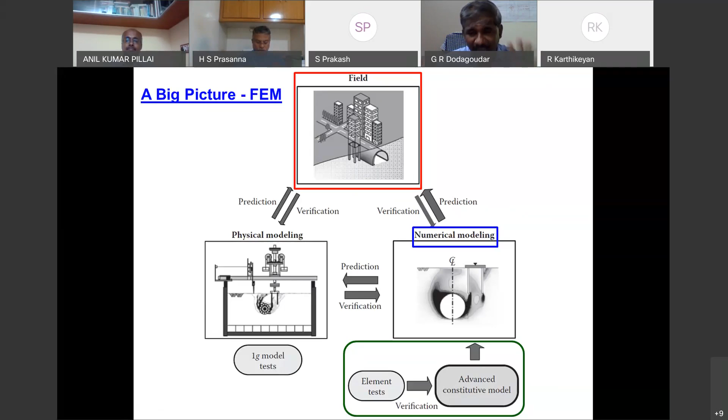The use of finite element is to predict the behavior of a prototype well in advance before erection. You can achieve this through computational modeling, or physical modeling in 1G scale, or centrifuge modeling, that is NG scale. Invariably, finite element requires constitutive models. The parameters needed for these models have to be evaluated based on element tests, or at most field tests, in order to obtain the parameters. Later you can use any of the softwares. Nowadays softwares are so powerful you can rely on those results and then execute the constructions.

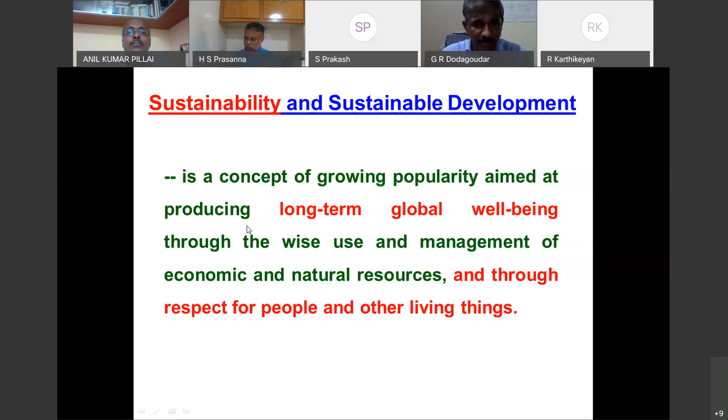This is the more comprehensive definition: a concept describing mankind's ability to create a world for humans and non-humans that is environmentally, socially, and economically sound. Note this word carefully - you must have environmental first, not economy first. Even without economy in your design, that's perfectly all right. It provides for current population needs without damaging the ability of future generations to take care of themselves. Bluntly put, sustainability means you should enjoy enough, but allow others to enjoy too. At the end of the day, you have to keep enough for future generations to take care of themselves.

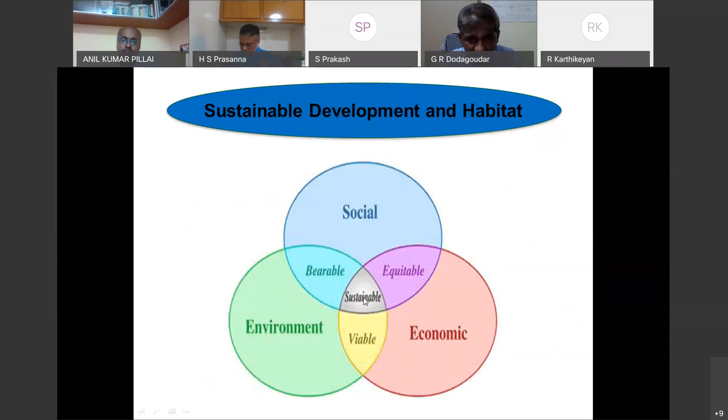This can be put in this form: sustainable development and habitat. What do you call sustainable development? Anything which is sustainable has to be bearable, equitable, as well as viable.

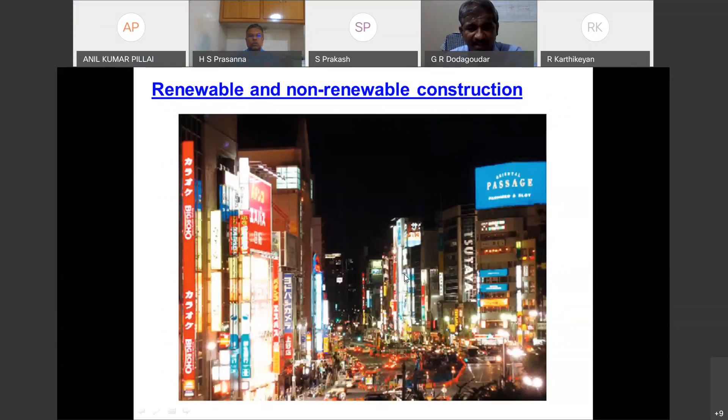With this, we'll move on to materials. What are materials? When stuff is useful, we show it respect and call it a material. When the same stuff ceases to be useful, we no longer respect it and call it waste. Basically, the definition of material and waste is relative and differs from person to person.

Now a little more about materials - why are materials so special, and why is man so special when using materials? Homo sapiens, that is us, differ from other species in our competence in making things out of materials. You have to accept this competence. We are not alone in the ability to make things - like us, many creatures make things out of material. But the difference lies in the competence demonstrated by man in his extraordinary ability to expand and adapt that competence through research and development. That is the reason we have an edge.

One can say materials have literally advanced mankind since earliest beginnings. You can see even our civilizations have been named after materials.

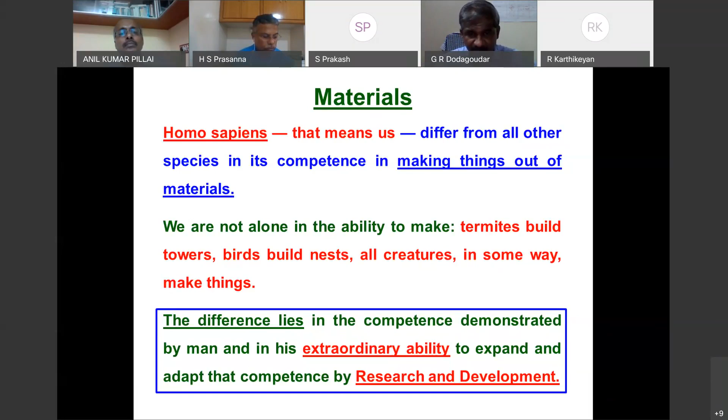Another important point here is to understand a little about embodied energy - I will explain this in the next slide. Take for example some materials: steel is 26 megajoules per kg. This is the annual consumption - right now, or 10 years back, this was the annual consumption. Similarly we have aluminum alloys, polyethylene, concrete, and device grade materials.

Take for example concrete - even though the embodied energy is 1.2, the cement industries are not that effective or efficient. Right now the concrete consumption annually is 30 billion tons - please understand, it is not just 1.5, it is 30 billion tons.

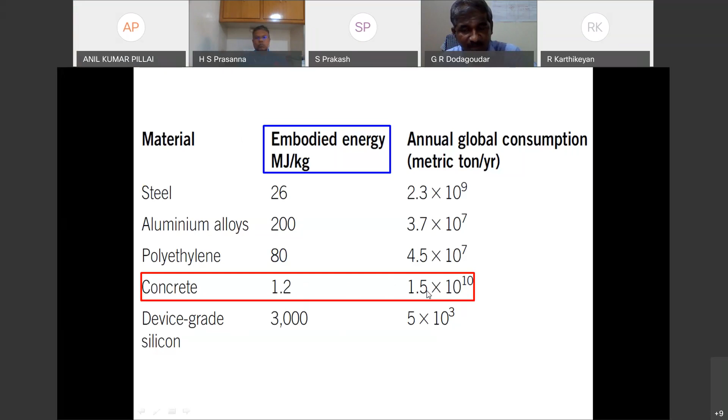The energy per kg of usable material is the embodied energy of the material. Even though you are constructing pile raft foundations, how much cement you are using, how many aggregates you are using, how much you are literally excavating, all of this matters because everything depends on it. I want to tell you at this point, 21st century living is equal to material consumption plus energy consumption, nothing more than this. Somehow you have to consume these two sparingly.

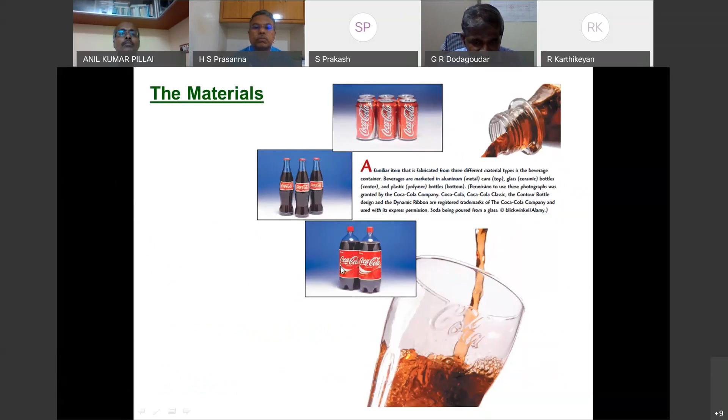Okay, where this PET is used, literally talk about materials. These are all different materials. Actually, PET granules are used in the manufacture of these containers, especially these cold drink containers that you are seeing here. Now, evolution of engineering materials with time.

Okay, a little more about materials. Materials are probably more deep seated in our culture than most of us realize. Materials are used extensively in transportation, housing, clothing, communication, recreation, and food production. Virtually every segment of our lives is influenced to one degree or other by materials. Basically, what has happened historically is that the development and advancement of societies have been intimately tied to the members' ability to produce and manipulate materials to fill their needs. Accordingly, our early civilizations were named after the capacity of human beings to develop materials to fill their needs. Accordingly, they are called the Stone Age, Bronze Age, as you have seen earlier.

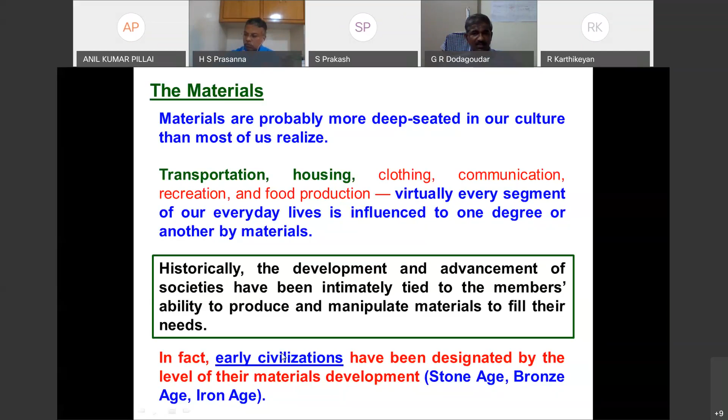Now coming to this dependence and dangers. Dependence is dangerous. If you depend on anything, take for example, nowadays for COVID treatment, we are depending on the government. How many days can one depend on the government? Who has to take care? Dependence is dangerous. Dependence exposes you to exploitation. That is the biggest problem. That's the reason we are using non-renewable material up to 96% right now. You have to be very careful.

Earlier, you used to treat materials as the faithful servants of human beings. If at all you want to give something to the new generation, we as human beings at present are supposed to be obedient servants of the material. Then only can you achieve the objective of sustainable development.

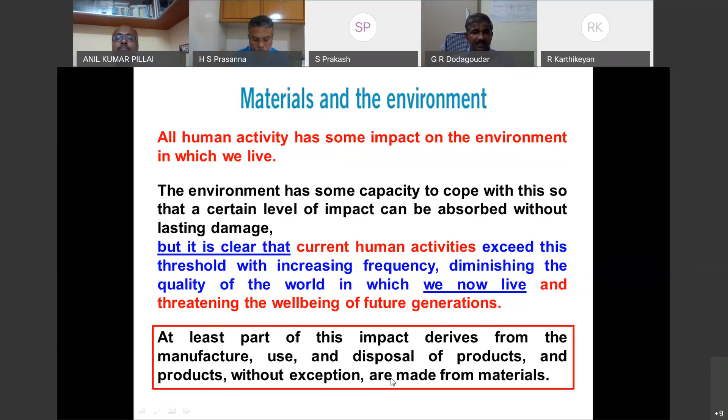With this, I'll move on to materials and the environment. How is this environment connected with the material? All human activity has some impact on the environment in which you live. The environment has some capacity to cope with this, that a certain level of impact can be absorbed without lasting damage. If you are creating some small impact, yes, the environment is going to take care of it on its own. But it is clear that current human activities exceed this threshold with increasing frequency, diminishing the quality of the world in which we live and threatening the well-being of future generations. At least part of this impact derives from the manufacture, use, and disposal of products, and products without exception are made from materials. That is how materials and environment are related.

What is the remedy for this? The remedy is you have to go for environmental design. In environmental design, we have two designs: one is for the environment, another one is for sustainability. What is design for sustainability? When you talk about sustainability, you have to adapt to the lifestyle that meets present needs without compromising the needs of future generations. Time scale is measured in terms of decades and centuries. Even though you are designing a pile raft, you have to think not in terms of 1 or 2 decades, at least you can think half a century. That is design for sustainability.

And then a little bit about the material life cycle, just to inform others. You will maybe be seeing only the product, how the product has come. Usually it will come to the natural resources, that may be energy, that may be feedstock.

Feedstock means your raw material and ore, and then the transport. Most of the times ore will be available elsewhere, so that has to be transported to some initial factory site where you are going to produce the materials. You have to have everything.

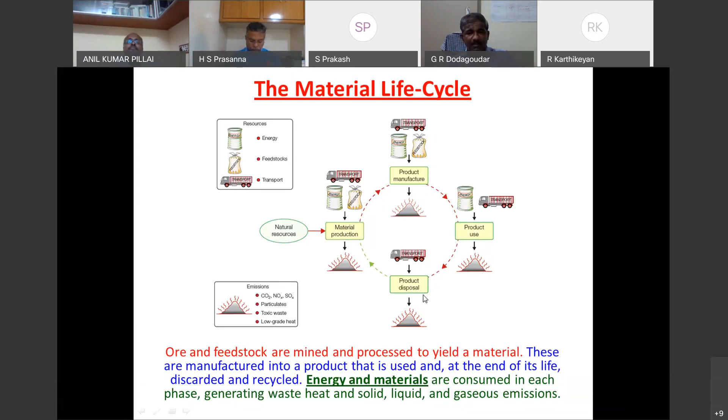When you produce anything, finally you are going to have some emissions, which may be in this form. Later it will go to the factory, where you produce the product, and then the product will be used. After the end of its first use, it can be discarded, recycled, or downcycled. Finally, after completion of its complete life, it has to be disposed. This is how we make use of this material life cycle.

We don't know where we are going to reach. We are more towards the 8 billion population now. This slide gives the population of the 25 most populous countries.

Am I audible, please? Is everything fine so far? Hello? It's fine, you can go, okay. Sir, yes, if there is any problem, we will let you know, sir. There is, yes, no please, point. Yes, please. Thank you, thank you, sir.

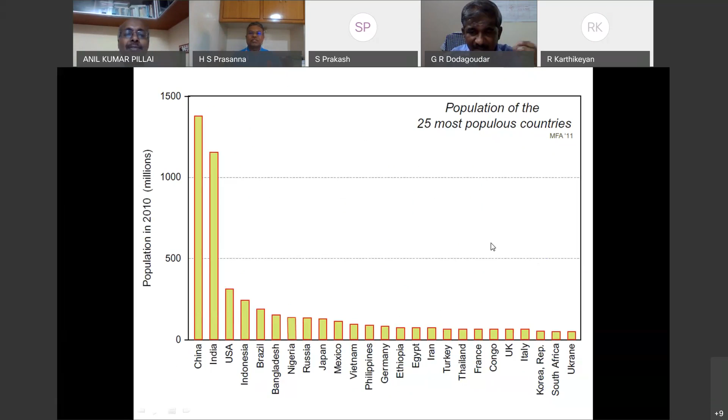You have a civil aircraft. Usually these are the life cycle phases: material production is the first one, the second is the manufacture, and the third is the transportation and use.

Actually, in case of aircraft, while usage only, you are going to use maximum energy, whereas in case of the material stage or manufacturing, you are going to use less. Similarly, for the family car as well as for an appliance like a refrigerator.

Whereas in case of a multi-story parking lot, or even any software park or any mall, you just see here in the material - in the usage you may not use more power. But in case of a private house, like our own houses, it is almost like a balance during material.

That's the reason one has to be very, very careful. If you are using unnecessary material which is going to consume a lot of energy, you will have a lot of losses in your building. That's the reason you have to invest a lot.

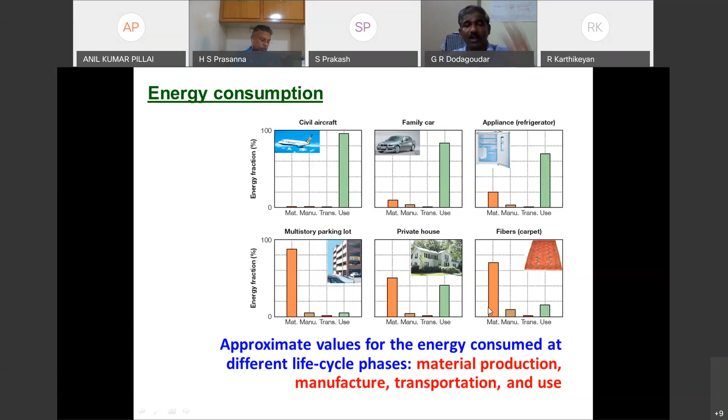Another one, fancy type of things - fibers, carpet, and all - will have a lot of material consumption in the beginning. Then coming to the end of life options, there will be different end of life options. Anyway, I'm not going to spend too much time on this.

In order to remedy all these impacts on environment that I told about so far, one has to choose the eco design. Eco design consists of two parts: one is eco audit, another one is the design.

Basically what happens is, these are the life phases: materials, manufacture, transport, use and disposal. You have to assess the energy as well as the CO2 release over life with respect to each of these five. What you are optimizing here, you have to minimize. In case of material, you have to minimize the mass of part, embodied energy, and CO2 per kg.

Similarly for manufacture, transport, and use. Especially in disposal, you have to select non-toxic and recyclable materials, and accordingly think of disposal.

Then material charts for eco design. Let's assume you are going for eco design—this is not at all necessary in our geotechnical engineering or even structural engineering. Yes, to some extent they are doing it. Nowadays they are thinking of using waste material and recycled aggregate. But one has to be very careful about how much energy is utilized in extracting the recycled aggregates.

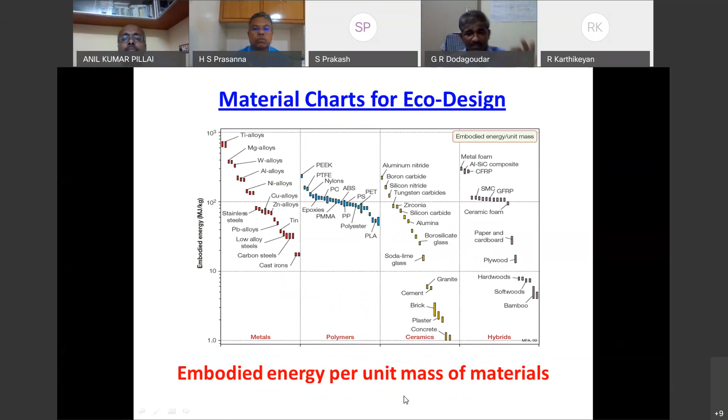These charts help us make an eco-friendly material choice, that means an eco-informed material choice. One has to use this, whether you want to use metals, polymers, ceramics, or hybrids—accordingly you have to go. But the only thing you have to ensure is that your embodied energy is minimum, whether per unit mass or per unit volume.

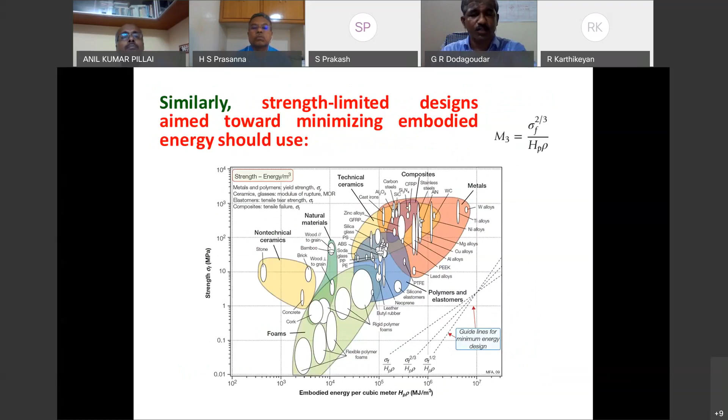And if you want to select the best material for your beam with a specified stiffness and length, you have to think of selecting this. This helps us make an eco-informed decision regarding material selection—this is for the best material for the beam. Similarly, in case you are thinking about strength-limited designs where you aim to minimize embodied energy, one has to make use of these things. All the materials are given here, even our concrete is given here.

One can think about how to make an eco selection. I want to tell you about these materials: one is glass, one is PE, another is PET, aluminum, steel. What are the design requirements? Design requirement is function, constraint, objective, and free variable. First of all, I have to have a container for cold drinks, then it's supposed to be recyclable, and you have to minimize embodied energy per unit capacity. Let's assume per unit capacity is a liter.

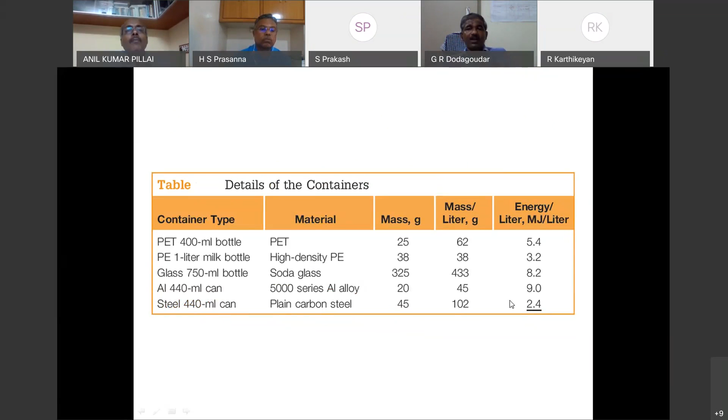Then choice of material—some calculation has been done with respect to these different materials. Then you calculate the energy per liter. Finally, the best material is steel, a 440 ml can. But since you are using this for 1 liter, that's the reason you have to go for 2.4 megajoules per liter. Like that, you can think of any material.

Similarly, you can adopt this concept for design of pile-raft foundation. I have given a few examples: one is the earlier one, and then crash barriers. For a static barrier, how are you going to choose? M stands for material index. Depending on the different type of application, this material index will be different.

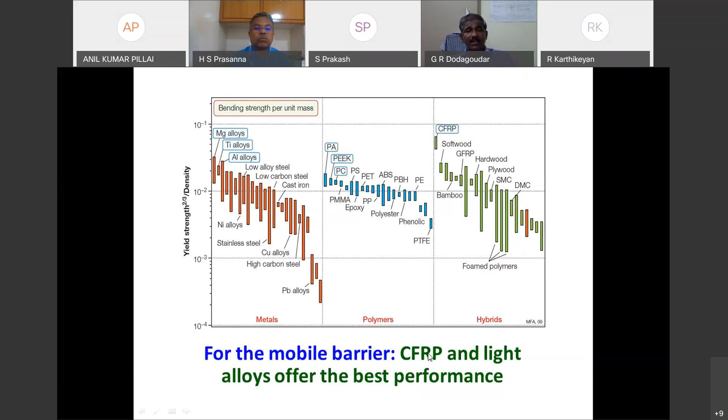Then another one is a car bumper, or else you can think of even your dynamic or mobile barrier. How are you going to choose the material? Wherever you are going to have the least embodied energy, you have to go for it. Especially for this mobile barrier, you can think of using CFRP or light alloy materials and so on.

Okay, with this I'll move on a bit to concrete—Ramco sponsored this. Nowadays they talk a lot about sustainability and durability of concrete structures, that too with byproducts and recycled materials. Because of the huge consumption of concrete, one has to think a lot and face this challenge. Most of the times you will ask: is this a waste or is it a resource? This question relates to this particular slide. Take for example pet coke, bagasse, rice husk, wood chips, or recycled aggregate—how are you going to use these?

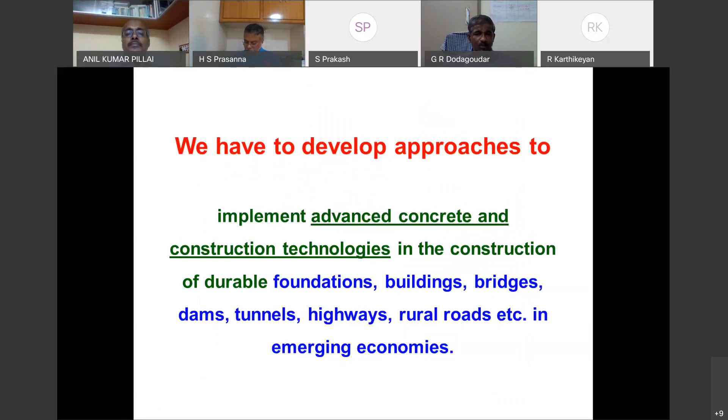Therefore, we have to develop approaches to implement advanced concrete and construction technologies in the construction of durable foundations, buildings, bridges, dams, tunnels, highways, roads, etc. in emerging economies. With this, I have covered the first part, materials and environment.

With this, I'll move on to pile-raft foundations. Now see, basically I want to tell you these are the major building parts—anyway everybody knows all these. In case you are going to have some cellar, in that case you are going to call it a substructure, otherwise it is a foundation. Both together constitute the foundation. Function of foundation, anyway you know, we have to transfer the structure load safely into the ground.

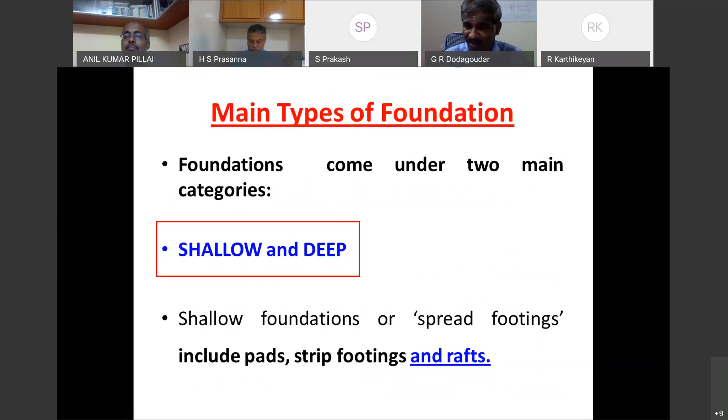Usually two types of foundation: shallow and deep. Raft is part of shallow foundation. You have to understand the analysis and design of raft thoroughly before attempting to design a pile-raft foundation. That's the reason I have given raft foundation. This is a raft foundation, and this is just a configuration—how are you going to model the raft foundation?

Over the years, we have started with the subgrade reaction approach, which one can use to evaluate the interaction effects. And if you want to bring in the coupling effects, one can choose springs like this in order to evaluate the interaction effects.

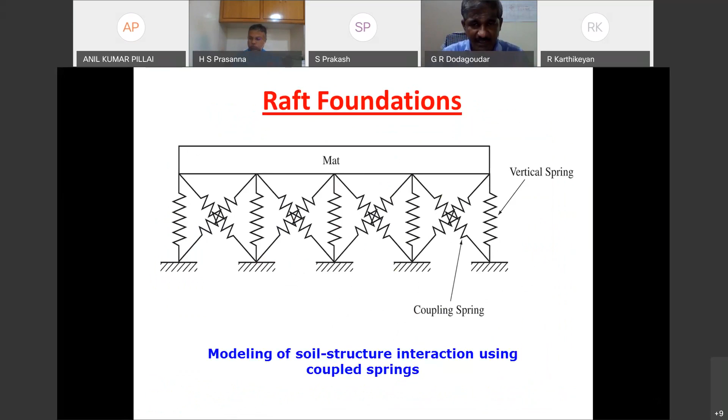If you don't want to use that, you can use a finite element approach. You can divide the bottom of your raft into a number of elements, which are connected spatially, and then this is connected in turn with the ground, the bed of springs like this.

Deep foundations include so many types. Our pile raft is a deep foundation. What is the specialty about deep foundations? Most of the time these are at deeper depths, usually more than 3 meters.

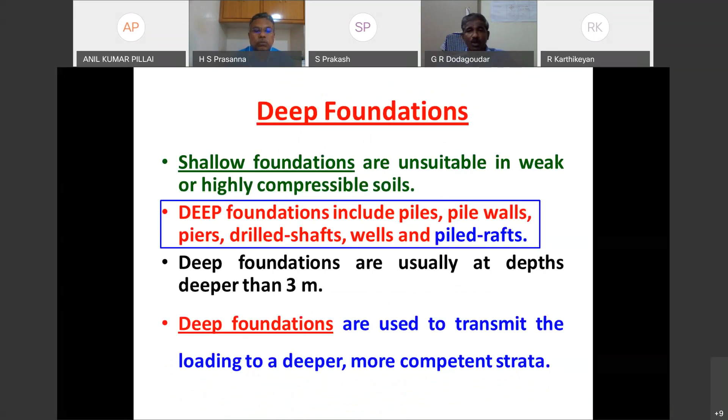They also transmit the loading to deeper and more competent strata. Another specialty of deep foundations, these two points are really very important, even though they look trivial: the depth of foundation is very large in comparison to its width. This is very important. Once you understand and appreciate this, you will understand how load is literally getting transferred in case of deep foundations.

Another point: you cannot simply use open pit excavation methods to construct deep foundations. For this, you have to have specialized equipment. These are the two special features of deep foundations. This is the load transfer mechanism between deep foundation as well as shallow foundation.

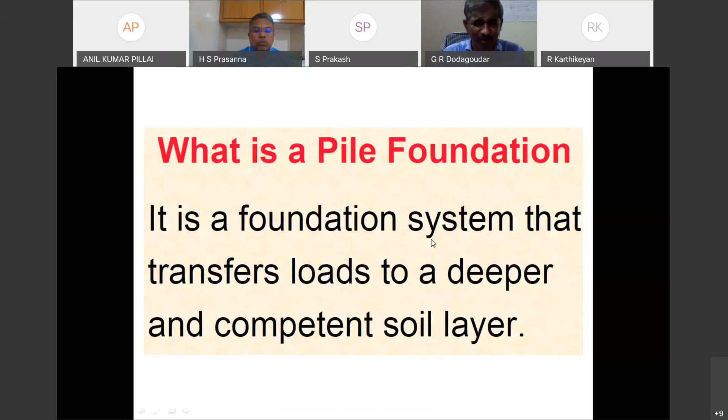Piles are always used in a group. They may be drill shafts or piles, or sometimes now they are using wells. In order to construct a high-rise building, you don't have to think of using some small piles. Better you can go for a single drilled shaft, or else you can go for a well. As far as India is concerned, you are using caissons, alternative name is well. Always they will be used in a group.

Okay, now see this carefully. One has to understand a little bit about the classification of pile systems. Even if you don't have time, at least you have to understand this. This is very important: friction pile and end bearing pile.

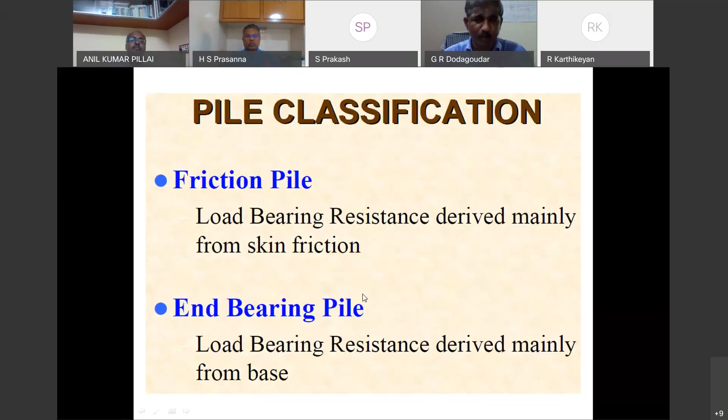Everybody knows this, but still I want to tell something about it. The most important geotechnical design requirement for most piles is that they have sufficient axial load capacity to support the applied loads. I want to tell you one thing: if you design your foundation, especially using piles, properly, then 20% of your axial load capacity is capable of taking lateral load. Then the pile transfers axial load through side friction and end bearing.

Hello? Everything is fine? Yes, sir. It's fine. Yes.

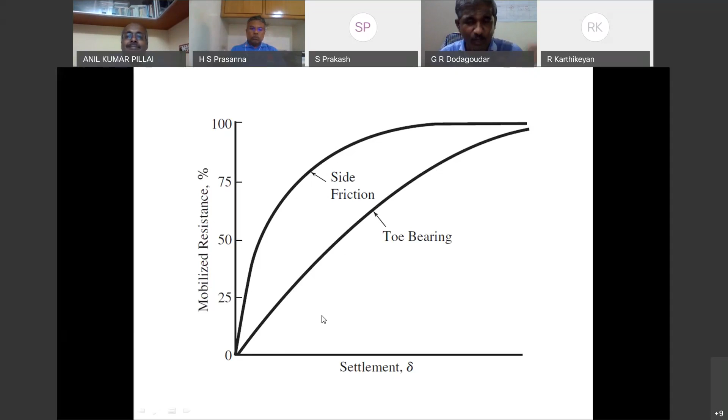How much should one consider the ultimate side friction? Just because soil is providing enough, one should not go for the ultimate value of side friction. This is also very important. Before executing any of the pile foundation activities, you have to respect all these points.

In that case, you have to depend only on the factory made piles or whatever is available in the market. So one has to be very, very careful while selecting the piles.

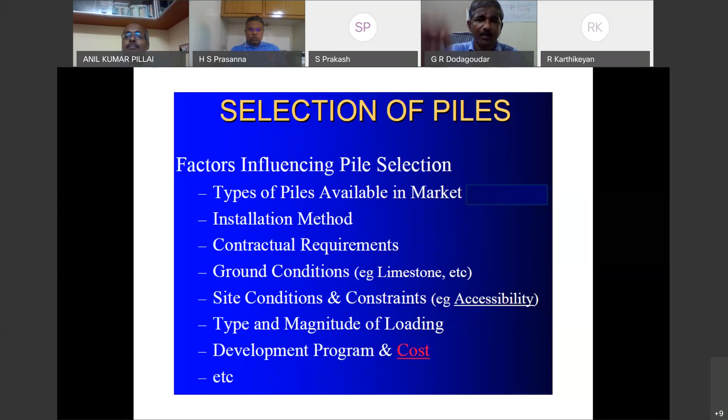Now, a little bit about design. Usually, while designing, we look for allowable structural capacity as well as allowable geotechnical capacity. Most of the time, geotechnical capacity is controlled by settlement. In case you have negative friction, one has to cater for that. Now, how are you going to get the pile capacity?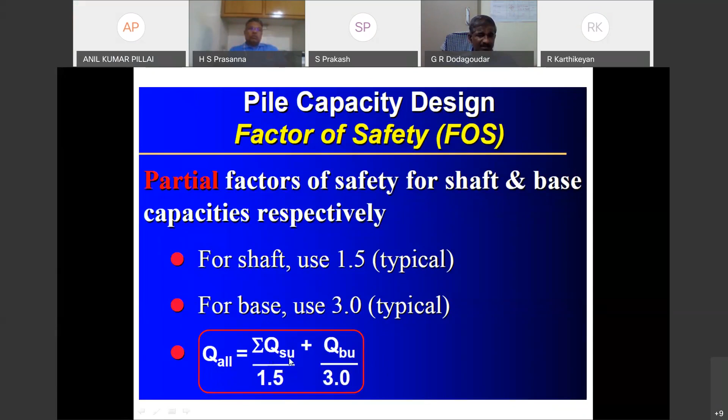In case you want to use only one global factor of safety, usually 2 is used in European countries. In India, we have to use 2.5. Only a few companies, like L&T and SPCL, are using 2. One has to be very, very careful. If you have total quality control during execution, then only you can go for 2. Otherwise, we have to go for 2.5.

Then the concept or idea of PRF. Why does one have to go for PRF? Okay, now please understand.

Please see this very carefully. Let's see, this is a single pile subjected to a load, and this is the ultimate load. Let's assume this ultimate load is divided into 4 parts. When you apply the first part, this is how you get the stress or isobar. Then the second, third, and fourth. The moment you reach the fourth one, that means it has touched the ultimate.

The same thing, when you use it for a pile group, what will happen? This is the isobar of a single pile, and this is the isobar of a pile group. Because of this isobar, you get a highly stressed zone. Because of the highly stressed zone, you get high strain. High strain multiplied by the respective layer thickness.

The video is not visible, sir. Hello, one minute please, Sangeeta. One minute please, video is not visible. What have you done? You can take a minute break also, sir. No issues. It's okay, now you are not visible. The slide is visible, now you are visible, sir. Yes, it's perfectly all right now.

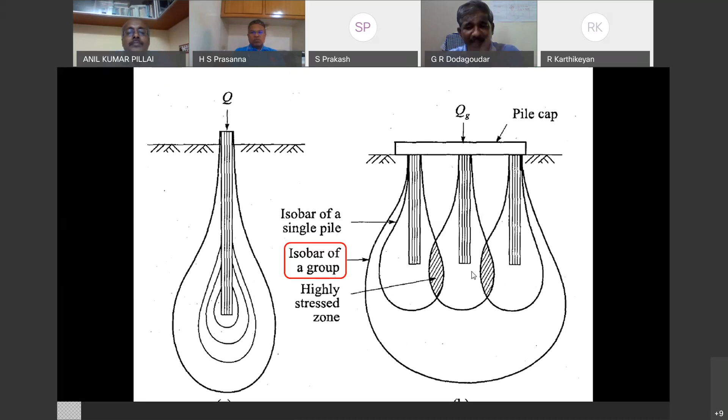Without understanding the interaction effect, you cannot do anything. Otherwise, what will happen if you don't know how to evaluate the interaction effect? Better to keep a large spacing so that you don't have any interaction. In that case, total load will be the summation of the individual load capacities of a single pile. But you have to evaluate it.

If you are not evaluating, what will happen? I want to tell you in the next slide. Please see the next slide. What will happen if I don't want to evaluate the interaction effect? It's fine, it's left to you, but finally you end up unnecessarily putting a lot of money below the ground.

In this case, basically what will happen? You are going to reduce the number of piles, no doubt. You will reduce the number of piles, but what will happen to the thickness of the pile cap? Actually, in a pile foundation, the pile cap does not transfer any load directly to the soil. It just acts as an intermediate medium, taking load from the structural column and passing it on to the piles.

The moment you put piles far apart, what will happen? The requirement of your pile cap thickness will be tremendous. If you simply put a larger pile cap, it is of no use. Here is where the genesis of the piled raft concept has taken birth. Anyway, I'm going to increase the thickness of the pile cap, forcing it to transfer a certain amount of structural load to the soil directly beneath.

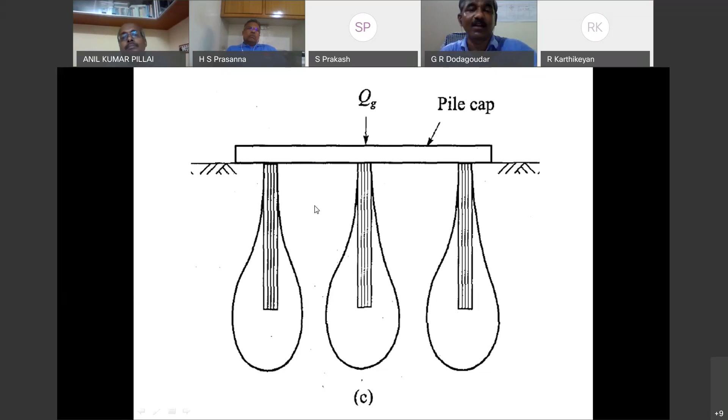Then how are you going to evaluate how much load has to be transferred to the raft cap? In that case, the cap will be called a raft. Okay, now let's see basically what will happen.

Some background and historical note.

This first sentence is very important. Recent years have seen major advances in understanding how pile foundations interact with soil. If you look at the number of papers published, pile foundations are the highest nowadays, and second highest are in ground improvement.

Earlier, the number of papers published was mostly on stability of slopes and shear strength, in order to understand the shear strength phenomena. Now, what has happened?

Particularly with respect to a pile group, the effectiveness of a pile in a particular group is generally reduced by the proximity of other piles. It happens even with human beings — if you don't like someone sitting beside you, sometimes you will not be happy. Recognizing this fact, if I am putting n number of piles, the effectiveness of a particular pile will be reduced because of the presence of other piles nearby. One has to recognize this fact.

Nowadays the current trend is more towards using fewer, more widely spaced piles. Because of this, you increase the thickness of the pile cap, forcing the pile cap to transfer a certain amount of load. While doing so, you allow the raft to contribute significantly to load transfer to the soil. That's the concept behind it.

Now coming to the historical note — why have people gone for this? Raft foundation is already perfectly understood, pile foundation is perfectly understood. Let's look at one construction that took place in Frankfurt, Germany.

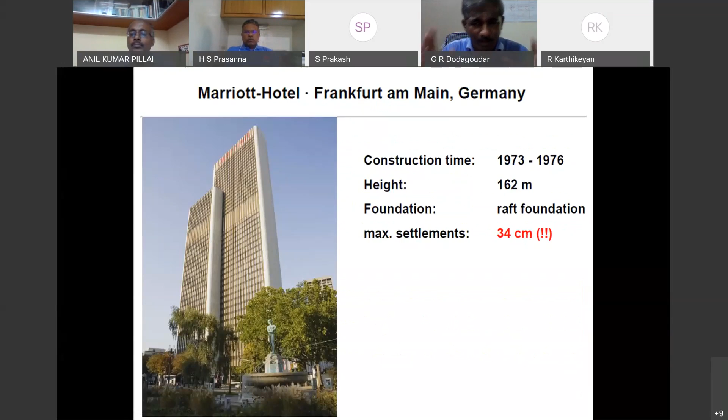The way out is you have to go for pile foundation, no doubt. But unnecessarily, you end up using more piles, and as you use more piles, it becomes more costly.

Now see a few more buildings from the same area. This is Commerzbank, construction duration 94 to 97, constructed on pile foundation. The settlement is 21 mm — perfectly all right.

Then coming to another tower called the main tower, constructed on CPRF — combined pile raft foundation. Settlement is 2.5 centimeters, perfectly all right. And then another one, 3.2 — raft foundation settlement is 11 centimeters.

Maybe it is okay for this building, but the height of this building is very less. The other one also has very little height, so this 10 centimeters is okay.

But now look carefully: settlement of foundations constructed on raft foundation is a little more, while settlement of pile foundation is less. In between, you get the settlement of combined pile raft foundation. Because of this combined pile raft foundation, you reduce the number of piles — that is how you bring in the economy.

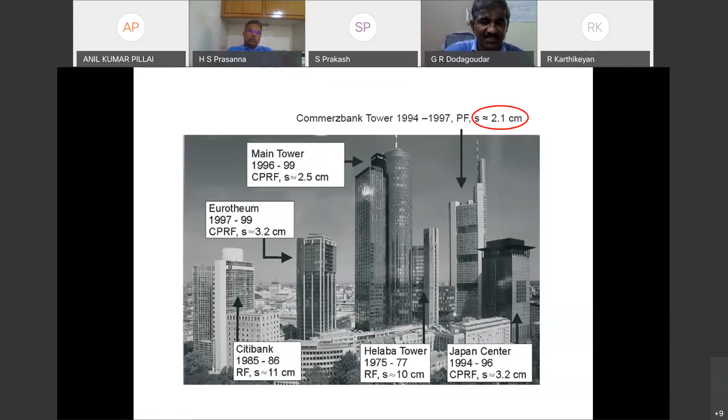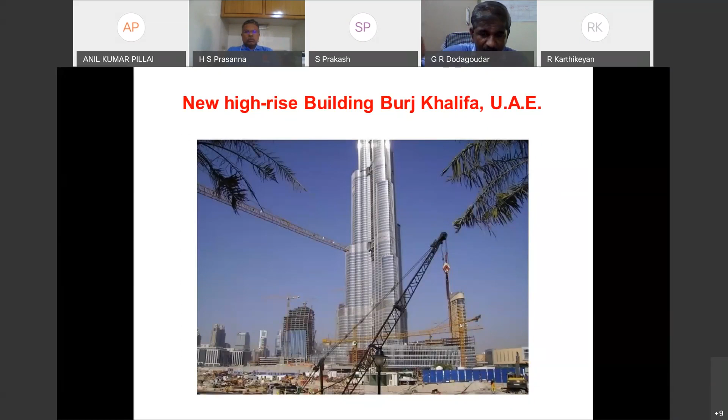I hope everybody knows this building — constructed on pile raft foundation. H.G. Poulos was the foundation consultant for this. It has been covered very well in his recent book, Tall Building Foundation Design, available online. Please do see that.

When you are using finite element, you have to evaluate higher settlement, and then you have to get lesser load. That is the fundamental behind using finite element, and then you have to verify it. Finite element works perfectly well, and this has been covered very well in that book.

Next, we'll move on. Another important thing with respect to the pile raft foundation is optimized geotechnical data acquisition. You have to evaluate; there is no substitute. In case of structural engineering, you have well-defined materials and quality assured materials.

In case of geotechnical engineering, first of all, soil is invisible. After all, we are drilling few boreholes here and there, and that too, we are disturbing only 0.1% of the affected volume. With that, you are going to evaluate the parameters. Even in spite of ground investigation, soil is still uncertain. That's the reason one has to use engineering judgment in order to evaluate the soil parameters.

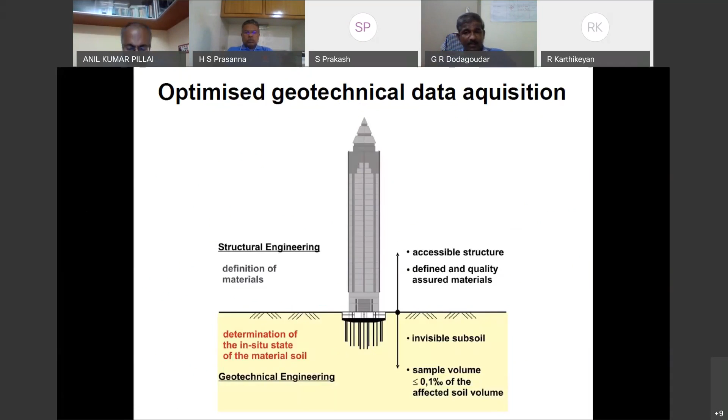There are many ways you can carry out investigations in situ. Especially the piezometer probe will use CPTU in the field at different depths. Laboratory testing is used in case you want to do some advanced analysis.

Small pile load tests also can be performed using this, or else you can go for real pile load tests in order to get the pile head load and pile head displacement. If at all you want to enhance the pile load test results, one has to go for Osterberg cells.

Usually they will be used in 3 locations. Usually one will be used exactly at the bottom. In case you have different layers, at the layer interface, one has to use and then test. Actually, Bombay people have tested more; we have done very few in Chennai.

Okay, if at all someone wants to know a little more about pile raft foundation, this is the starting paper. Please go through this; it is available online, written by Poulos and others. Now see, what is this pile raft foundation?

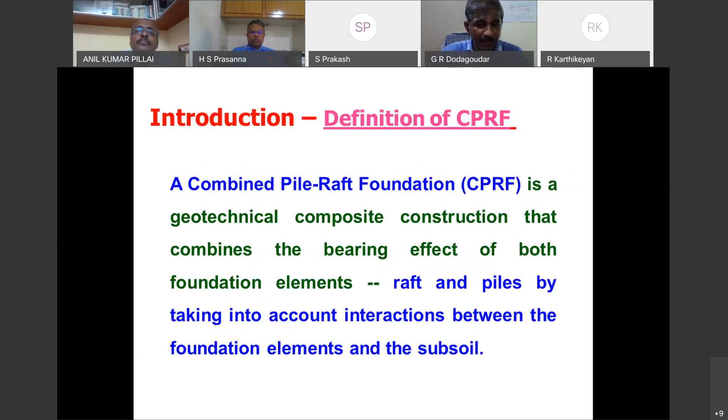Pile raft is a foundation which acts as a composite construction consisting of 3 foundation elements or load bearing elements. First one is the piles, second one is the raft, another one is the subsoil. In order to evaluate properly, one has to account for interaction between these foundation elements and the subsoil.

The moment the raft is going to transfer certain loading, you will have the settlement-dependent pressure, sigma xy of s. The total load coming on the pile raft is resisted by the total resistance offered by the raft as well as the piles. Here the raft is going to offer the raft area multiplied by this stress, giving the raft resistance, plus the summation of all the pile resistance. In the pile resistance, you have the end bearing as well as the skin friction.

You can just see, already Mandolini and others have collected some experimental data. They were able to evaluate the load shared by the raft. Usually it varies between 20 to 60%.

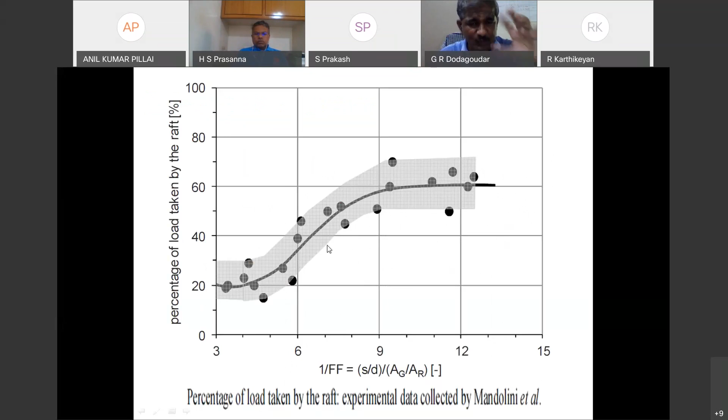For reliable design of pile raft foundation, one has to restrict the load transferred by the raft to the soil to around 40%. Otherwise, settlement of your foundation will be too high. This I already showed earlier.

Okay, why first of all pile raft foundation? This question will arise. Nowadays, these are increasingly being recognized as economical and effective foundation systems, once you recognize them as economical and effective foundation systems for tall buildings.

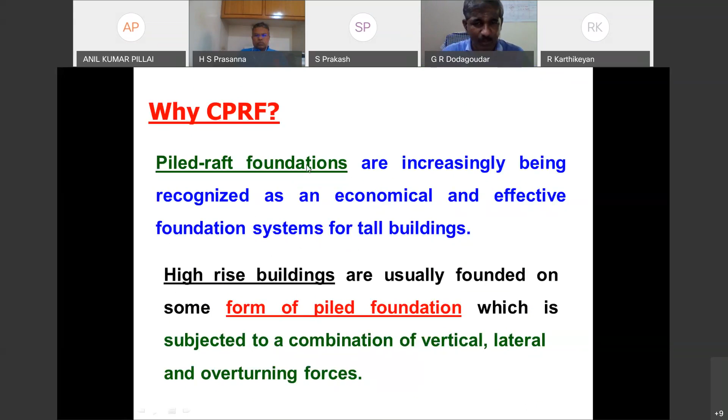Somehow, most tall buildings or high-rise buildings are supported on some form of pile foundation, which are subjected to a combination of vertical, lateral, and overturning moment loads. That is one thing. Another important thing is they are a particularly effective form of foundation for tall buildings. Not only that, the second reason is the raft is able to provide a reasonable measure of both stiffness and load resistance. This is very, very important. Here I am forcing the raft to transfer a certain amount of load directly to the soil.

By so doing, we are using that stiffness as part of the overall pile raft foundation system. The advantages are numerous. Usually piles will be acting at the serviceability loads. If you want to utilize the capacity at ultimate loading, the raft element comes into picture. Consequently, it is possible to reduce the required number of piles when the raft provides this additional capacity. That is how we bring economy into the construction of pile raft foundation.

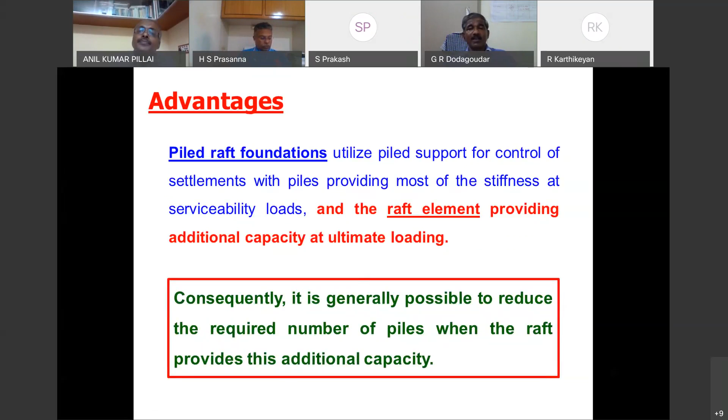Another important point most people miss: as I mentioned earlier with sigma xy, we are going to have extra lateral stress acting on the soil as well as on the piles. Due to that, you get a higher ultimate bearing capacity. This is usually not accounted for in case of usual pile foundations, but it has to be. This is the added advantage. But here you can say there is a catch.

Way back in 2001, Poulos published an old paper stating nowadays you can use pile raft foundations everywhere except soft clays. In case your cohesion is less than 20 kPa, you are not supposed to use the pile raft. Please, you have to be very, very careful, otherwise you're going to face a lot of problems. For any other type of soils, stiff clay or dense soils, you can use it, as he mentioned. But he modified his statement in the recent paper, the book Tall Building Foundation Design.

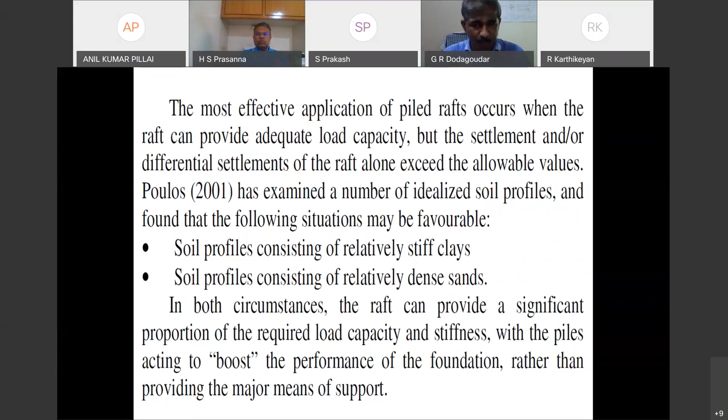So what is the catch here? The important catch is understanding the soil-structure interaction effect. It is indispensable for the proper design of pile raft foundations. One has to understand this very carefully. And then as usual, we have design principles that someone has to satisfy. Anyway, I'm going to go fast here.

Construction is one of the most important aspects, as I mentioned earlier. No matter how complicated the analysis technique, no matter how much knowledge you have, if you are not constructing properly, everything is literally useless. Basically, you have to have a geotechnical expert on site, maybe appointed by the owner or supervising authority, and you have to have protocols for the acceptance procedure.

Let's assume you have built 10 stories out of a 100-story building. The moment you reach 10 stories, you will know literally how much weight you are putting on the soil. Based on the actual loading, you have to evaluate the settlement. Based on some monitoring exercise, you already have a prediction tool like finite element analysis. You compare, and if the comparison is acceptable, then you go ahead and continue construction of the CPRF.

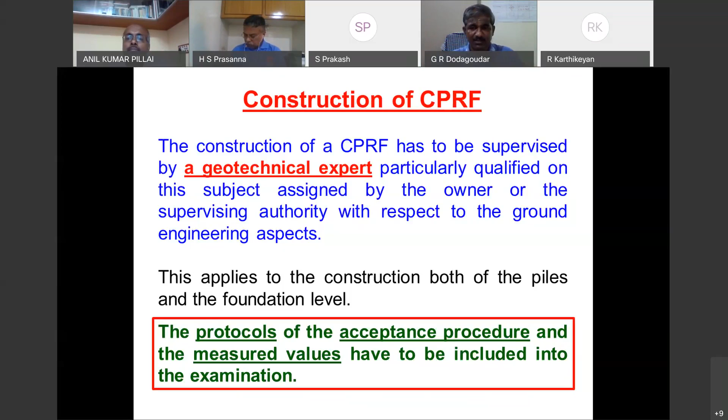With respect to this, we have an observational method. I hope you are well aware of it. But it is not a substitute for round calculations. In a way, it's a handy tool in geotechnical engineering.

Another important aspect is monitoring. This is also very, very important. You have to decide what type of instrument to use and what type of acceptance criteria one should use before execution of the PRF construction.

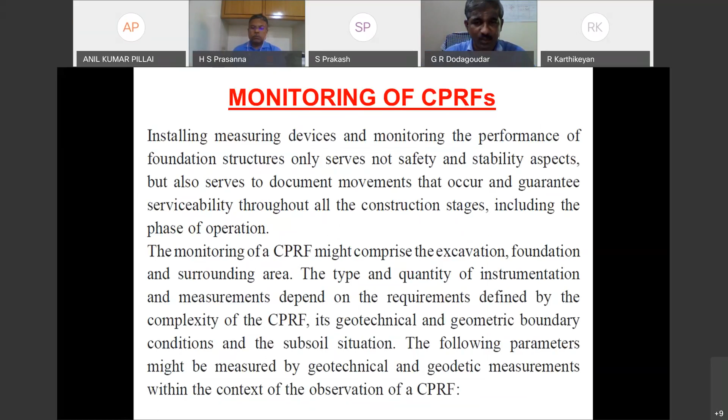Now you have to study a little bit about the interaction. In order to design pile raft foundation, one has to have a qualified understanding of different interactions. Please understand this word very carefully. Even if you take nothing else from this, please listen to this point: designing pile raft foundation requires a qualified understanding of different interactions. Literally more than 6 interactions are possible. Two interactions are not that important, but four interactions are literally important. You can instrument properly and perform experiments to evaluate the interaction, or you can have a sophisticated computational tool to evaluate all these interactions. And then finally, what is the total resistance coming from? Total resistance is coming because of the raft. Please note this very carefully.

This total resistance is supposed to be much higher than the total load coming on your structure. Total load coming on the structure is supposed to be less than or equal to this total characteristic resistance. K stands for, nowadays in Europe, they are using limit state design, that is the reason this K word has been used. Total resistance is given by the pile resistance as well as the raft resistance.

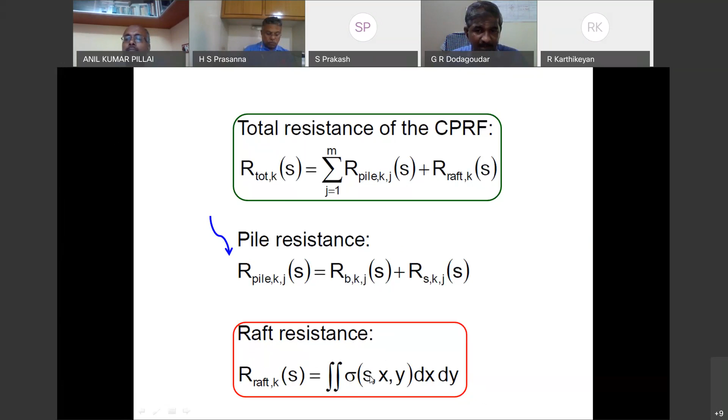The bearing power of CPRF is usually determined by the coefficient called alpha CPRF. This alpha CPRF is called the pile-raft coefficient. This is defined by the total load taken by the pile divided by total load coming, or total resistance offered by the pile-raft foundation system. Based on this, you are going to decide whether my CPRF, combined pile-raft foundation, is going to behave like a raft foundation alone, or else pile foundation alone, or in between.

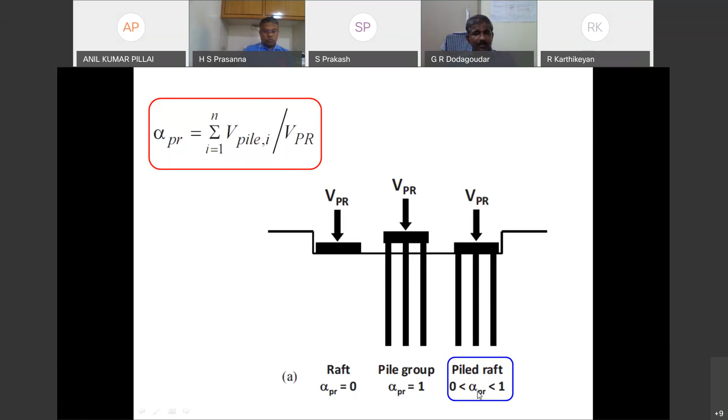In order to have a pile foundation CPRF effect, one has to restrict this number around 0.5. That is shown over here. This depends on the stress level as well as the settlement of the CPRF. You can see clearly here: if it is 0, your CPRF is going to behave like a raft foundation. If it is 1, it is going to behave like a pile group, and in that case your raft is going to behave like a cap. You have to fix this number in between 0 and 1, usually around 0.5. I will show you how to get that one next.

Sometimes you have a question, how to consider the pile Young's modulus. You are not supposed to use the Young's modulus of concrete alone. Depending on the percentage of steel used in your pile - this phi stands for the percentage of steel used - you can use this formula. It is a recent addition; many people have done experiments, and one can use this one.

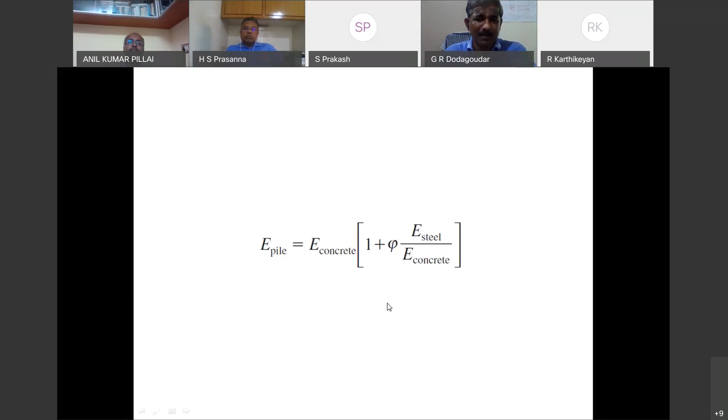After performing this, you see basically what will happen to the skin resistance. If you are at 10%, you will fully mobilize your skin resistance, and also to some extent you are mobilizing the end bearing. If you have only 1% of your pile diameter, you are at this level. If you have 0.5%, you are at this level - that means everything will be under elastic as far as a single pile is concerned.

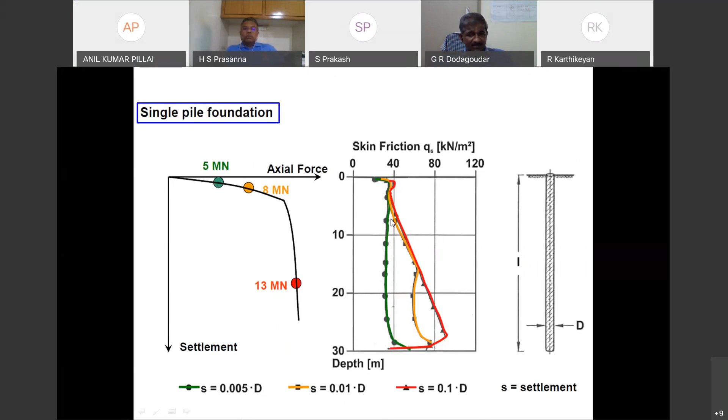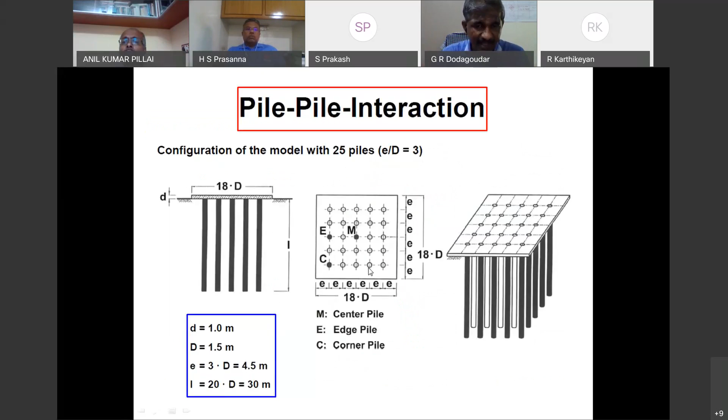Now we'll move on to understand a little bit more. So far we have done a simple exercise. Now we see basically what will happen if I have pile-pile interaction. In case of closer spacing, where spacing is 3D, I have a center pile, edge pile, corner pile, similarly with all these specifications.

In the second case, what I have is a larger spacing. When you have a larger spacing, there will be no group interaction effect. But you have to evaluate this, you have to show through experiment or else through numerical simulation.

Here I have performed this especially for load settlement behavior. With respect to your R total, it is exactly the same. You can treat it as 1 R total, 2 R total. What will happen if you have a 2 R total? Your settlement will be tremendous. Most of the times you will go on to cross the allowable limits. That's the reason you would always consult whether you treat it as an individual pile foundation, spread footing, raft foundation, or else CPRF with only pile.

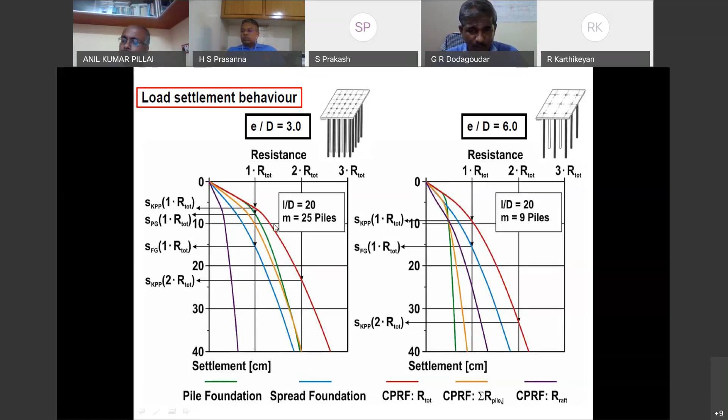In the CPRF, especially in finite element, you can force the raft to not take the load. Like that you can do it. Or else, as usual, CPRF R total - this red line corresponds to that. This is what is shown in the design philosophy.

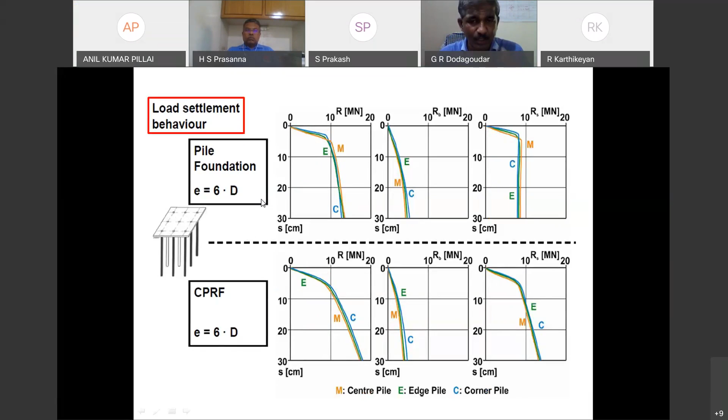When you consider 6D spacing, now see this very carefully. What you can infer from this plot is there is no interaction effect. That is the reason the resistance versus settlement is not shown for single pile.

Okay, with this little understanding, let's move on to the understanding of a few case studies - how people have used this pile CPRF concept. This is one of the first applications in the world as well as in Germany.

This particular building is called Messe-Torhaus, situated in Frankfurt am Main, Germany. This was the first application in the world as well as in Germany. Construction duration is 1983 to 1985. These are the specifications of the raft. The CPRF of the Messe-Torhaus consists of two separate rafts - one is north and another one is south - each with 42 bored piles with a length of 20 meters and diameter of 0.9 meters.

Below each raft, the piles are arranged like this - 7 rows, 6 columns arranged uniformly under each raft with pile spacing of 3 to 3.5. This is very, very important. One should not stick to a single pile spacing; it depends on the load coming. Whenever the load is more, you have to go for closer spacing. Whenever the load is less, you have to go for larger pile spacing.

The both rafts have dimensions - these are the dimensions of the raft, 17.5 into 24.5. Each raft is forced by an effective structural load of 200 MN. It is a very high load.

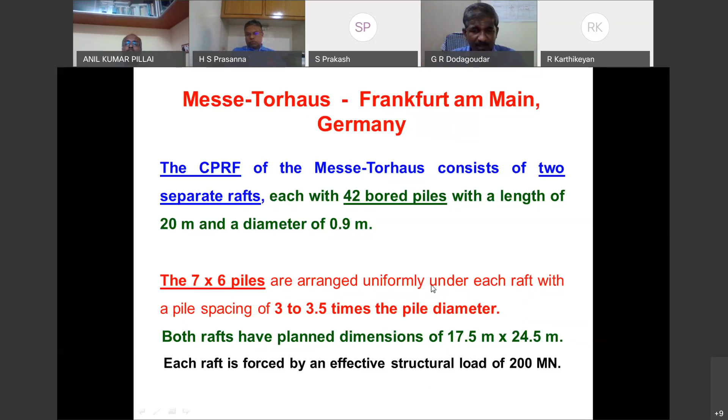Now I'm going to move on to the second case study. This is well documented in the ISSMGE technical report, report number TC212. The name is Messeturm, Frankfurt, Germany again. Basically, what they have done is initially they started with the concept of shallow foundation, that too using a raft. They could get more than 40 centimeters of settlement.

First of all, it is not at all acceptable that for this 40 centimeter, 75 to 80% could be able to get within the top 20 meter. Again, it is very, very difficult. That means you are stressing the top 20 meter below your foundation.

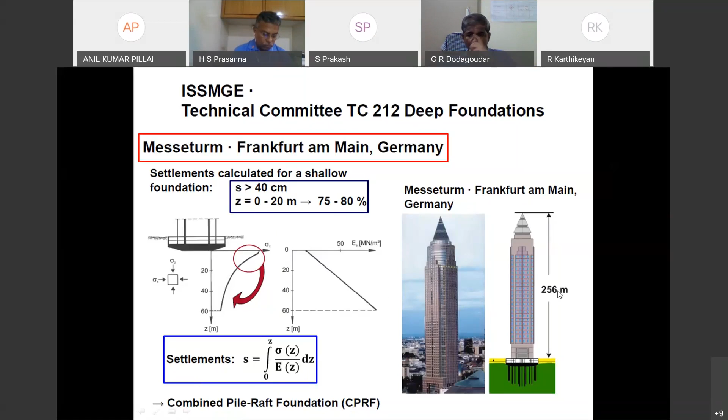Anyway, you can see in the next figure the configuration of the pile raft. The dimension is 58.8 by 58.8. Depending on the load, they used 3 rings: the center or inner ring, the middle ring, and the outer ring.

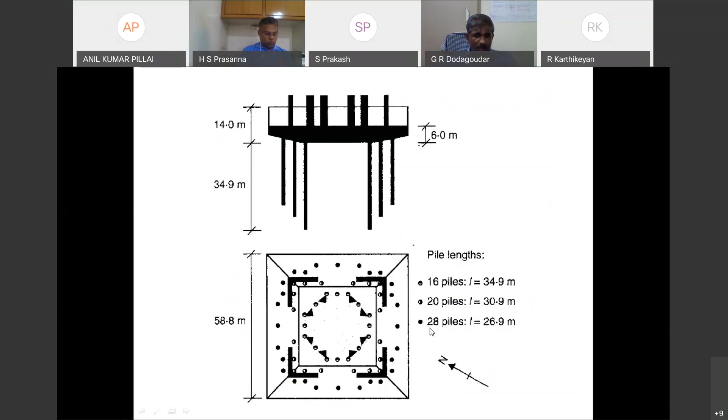Depending on the ring, they also used different lengths. Please see this very carefully. This is more clear in the second slide. This is the configuration of the pile raft, showing the thickness of the raft, and one ring, another ring, another ring. But all the rings have different lengths. Totally, you have 64 piles with different lengths. Average length is 30 meter.

With this, they have instrumented as usual. Some are instrumented piles, some are extensometers, and they have 11 raft pressure cells. These are needed in order to know the raft pressure or stress transferred to the piles, so that you can evaluate the load taken by the raft.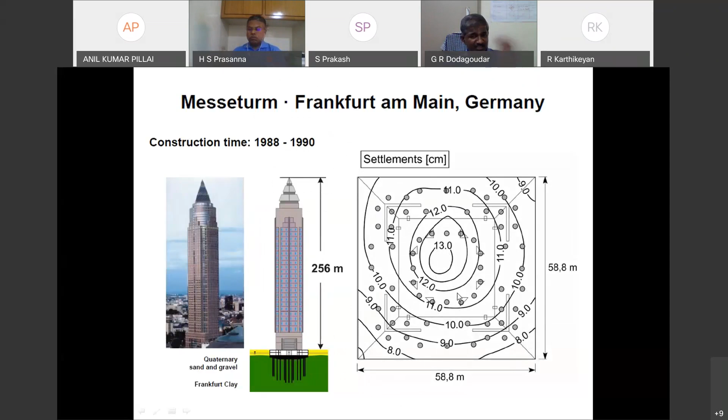I want to tell a little bit about this. Now you see this very carefully what will happen. We have a central ring with longer piles, then a middle pile ring, then an outer pile ring. See how the load is getting varied, and similarly how the skin friction is getting varied.

They could evaluate this through actual measurements as well as the finite element analysis. But to know the total cost of pile construction, one has to get the average load and also the average pile length. Based on this, we see what will happen.

Now I have to evaluate the CPRF. What is the total load on the building? The total load of the building transferred to the pile raft is 1,570 meganewton. Actually, it is a comma here. They could achieve this using CPRF with 64 piles.

The load taken by the piles is 725. The difference is taken by the raft. The raft load divided by the raft area is 250 kN per meter square, which is well within limits. Using this formula, you can get the result. As I mentioned earlier, CPRF has to be around 0.5 so that you can reduce the settlement well within the allowable limit.

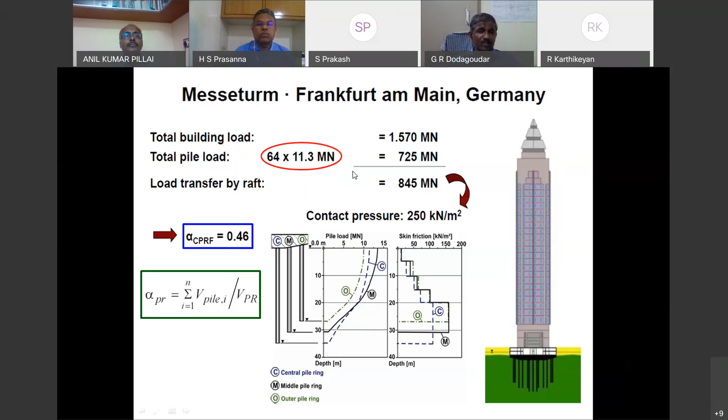Then what about the cost of pile production? 64 piles of 30 meter at 780 US dollars. Actually, this calculation is from 15 years back. 1.5 million US dollars - we could construct this building foundation with this cost using the CPRF.

Instead of this, you could have gone for a pile foundation. You would have required 316 piles with average pile length 30. In this case, the cost of pile production is 316 multiplied by 30 multiplied by 780, that's 7.4 million. The difference is the savings in cost of pile production. Please see the number - this number is very high.

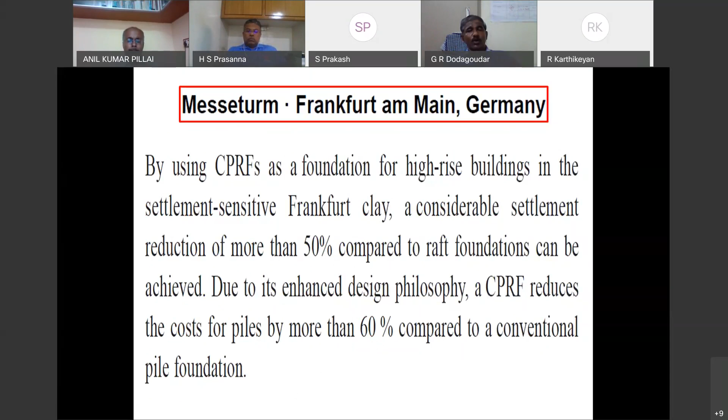That is how you can bring in the economy as well as reduce the impact on the environment. What is the take-home point here? Basically, you have reduced the settlement by 50%. Otherwise, you could have gone for a raft foundation and increased settlement by 50%, or gone for pile foundations and invested 60% more than the usual cost of your CPRF. That is how you bring in economy and even safety.

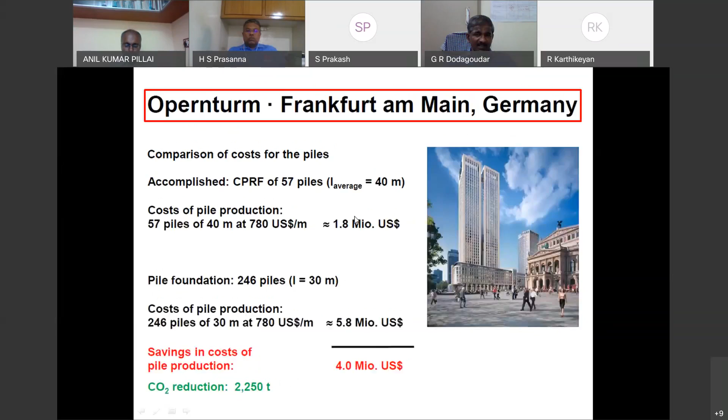Another one is City Tower, Opernturm in Germany, where they used finite element analysis. Another one is the Business Bay district. Many times what happens is our geotechnical engineers give a lesser value. Exactly this happened in Dubai. Based on actual pile load test and finite element analysis, they were able to...

Sangeeta, something... hello. Hello, am I audible? Yes sir, you are audible. Yes please, something has come in between. Nothing has come in between, it's audible, now it's fine please. Yeah it's fine, okay sir. Please reply. Clear. I'm telling all the audience.

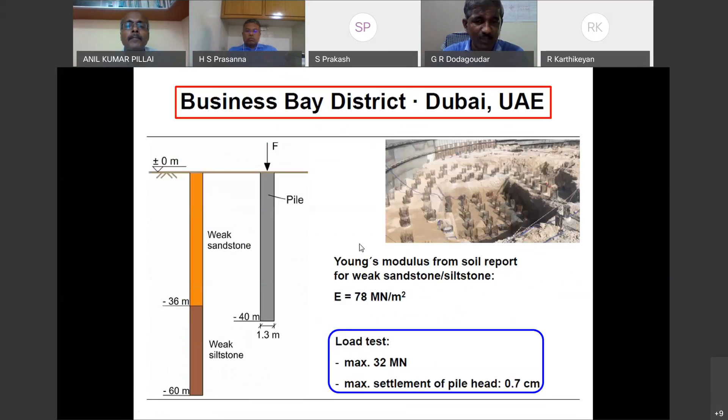Someone wants to know more about pile raft foundation. This case study is ultimate, please see: Business Bay district, Dubai. Actually they committed a blunder. The geotechnical report had given 78 meganewton per square meter. Literally, after the pile load test, they were able to back-calculate Young's modulus at this number. Because of this, they were able to reduce the pile length by more than 20 meters, so finally they used only 17 or 18 meter pile length.

These are your mechanics of materials calculations. One can use these things also to evaluate the effectiveness. They used PLAXIS here. Instead of using 40 meters as initially suggested, they ended up using only 18 meters. They were able to achieve the construction.

What are the recommendations? These are a few recommendations, one can have n number of recommendations. Piles have to be set directly under the load of the superstructure, such that the center of the pile group is under the center of the load. A few long piles are better than many short piles.

Many times, with bored cast-in-situ piles, you cannot change the diameter; at most you can change the pile length. The length of the pile has to be adapted to the loads: shorter piles at the edges and corners of the raft, and longer piles in the inner part, depending on your structural configuration. The optimum CPRF coefficient is very important to evaluate—you are not supposed to cross more than around 0.4 to 0.5, which is perfectly all right for Indian conditions. A few more recommendations you can think of based on this presentation.

Right now the highest high-rise building under construction is the Kingdom Tower, in Jeddah. Please see this figure very carefully. This is Darmstadt—here is Katzenbach. This is Dubai, where Burj Khalifa is, and here is Jeddah Kingdom Tower, analyzed by Katzenbach. This is the tower—it's an isometric view, not yet ready. It is more than 1,007 meters.

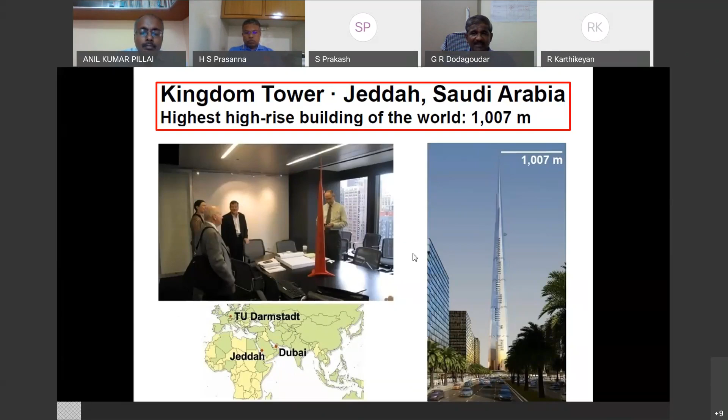And then see here what happened. Finite element results, here is the load test results. The perfect matching between the load test result as well as finite element for the upper pile segment. This is the middle pile segment you can see.

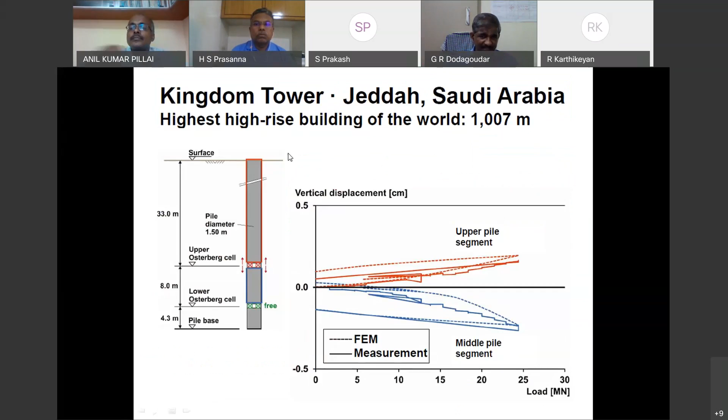Okay, that's it. I have planned some future directions. You have to optimize, bring in the optimization. You don't have to go for uniform length. Wherever the load is more, there you have to go for longer length pile. Wherever load is less, there you have to curtail the length of the pile. But you have to show this through proper analysis. Qualified understanding is a must. Otherwise, no one will accept.

The other one is elastoplastic analysis. Nowadays, what are you doing? Basically, you have to reduce the internal stresses and the bending moments in the raft. Everything depends on the stiffness of your raft. If you are not evaluating the stiffness of your raft properly, you are not supposed to transfer load unnecessarily too much to the soil directly. This is one thing.

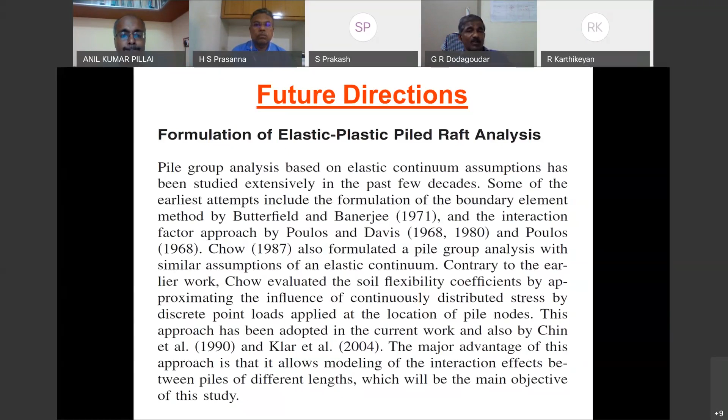There are many more, and these are some summary points, please. This is the last slide. Design of pile rafts requires a detailed and adequate site investigation program to collect all relevant data of the subsoil and ground conditions. An economic and safe design of PRF is only possible if soil structure interaction is considered using adequate and reliable calculation methods.

Here one has to have a qualified understanding. The design of a raft has to be controlled and proven by an independent geotechnical expert concerning the relevant assumptions and calculation model and the results calculated by the designer.

Application of the observation method is an important aspect for the successful design and construction of pile rafts and is recommended in every case. Especially in geotechnical engineering, you have to use this observation method, but don't think of it as an alternative for wrong calculations. No doubt it is a handy tool during execution. One has to use this.

With this, I am going to stop. There are many issues to be solved in future. You can think over it, hopefully those working in this particular field may be aware. One especially, quality assurance and control is very, very important apart from sophisticated analysis.

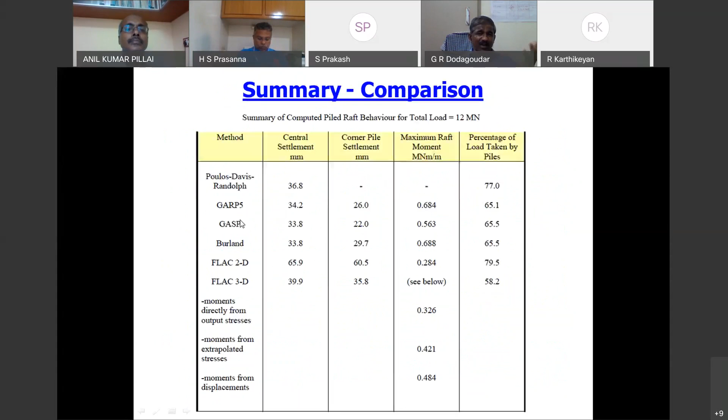A few concluding remarks, anyway, are not added. Already many people have attempted and compared the performance using different software - Plaxis 2D, 3D are used, ANSYS is used, and even nowadays especially Australians are using Abaqus software. They are giving comparable results. One can depend on most of these software.

This is the statement for young students. Don't expect to become an expert overnight. Intelligent effort is needed, and this is also very, very important. Knowledge, understanding, and will to implement are the prerequisites for effective implementation of any tool.

As a professional engineer, as a teacher, we have to have knowledge about the system. Knowledge is not sufficient, you have to have proper understanding. Once you have understanding, will to do and will to implement are the mantras for successful implementation of any tool.

With this, I will conclude my talk. Thank you one and all for your patient hearing.

Thank you so much, sir. That was very enthusiastic, energetic. But there was no problem in between, no? No problem, sir, it went on absolutely. It was marvelous. When you did the mock presentation, that time you had a few problems, that's the reason I was worried. In between I was asking whether I am synchronous with my slide. If I am presenting one slide and the explanation is something else, otherwise people would have fired. Anyway, thank you so much, please. Perfectly synchronized. Thank you so much, sir.

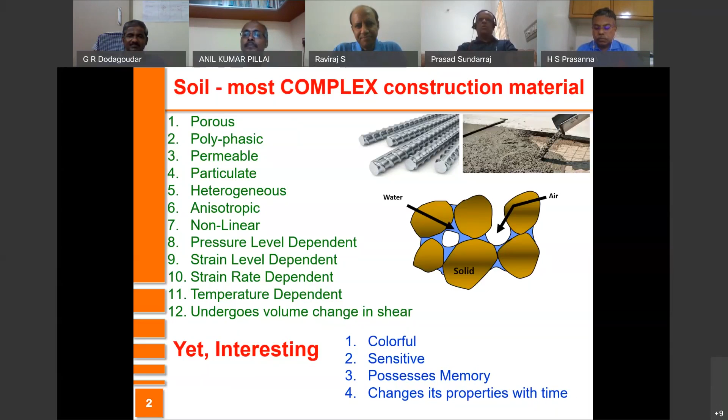Therefore, you should treat soil with respect. Soil, I always say, is an intelligent material, a smart material. So if you treat it well, if you respect it, it behaves according to your requirements. Otherwise, it misbehaves, shows in the form of failures. So I just want to mention, take these things in mind, that we civil engineers will have to give importance to soil. We should not neglect soil.

Keeping that in mind, we set our objectives for RAGI 2020. Basically, to enhance the knowledge of civil engineers in advancements in geotechnical engineering, which is happening continuously. And then to bring together stalwarts in the area of geotechnical engineering under one platform. I'm really proud and happy that stalwarts, 4 speakers, have agreed and come together, and we are privileged.

And then to strengthen the industry institute interaction, bringing together 2 of the finest engineering colleges in Mysore, SJCE and NIE, along with 2 very important professional bodies, Association of Consulting Civil Engineers and Indian Geotechnical Society. And then industry, Ramco Cement, really made RAGI 2020 wonderful, and L&T also joined us. So through this webinar, we brought them together, and whatever we say about academics, industry institute interaction, that is perfectly done with this.

Our intention was to make this knowledge sharing reach more than 1,000 people. I feel so admired and happy that it is not just 1,000, it is 6 times more. On average, every day we have had about 6,000 professionals from across the country listening to the wonderful speakers.

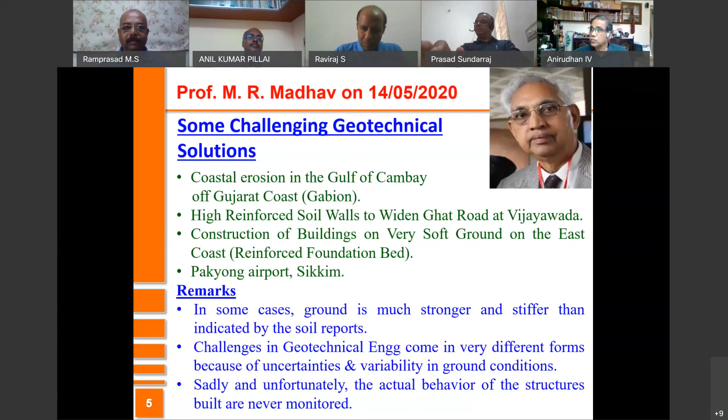Then on Friday, 15th May, we had a presentation by engineer Mohan Prasad. He spoke on some common misconceptions about geotechnical investigation.

Sir, you were really reaching out to the structural engineers on the basic fundamentals, the importance of geotechnical investigation, and how the investigation should bring structural engineers and geotechnical engineers together. You also stressed that you'll have to look at the site globally, not in isolation, and that the geotechnical engineer should not stop looking at the site up to investigation alone. Even after that, he will have to go and see whether the report given is realistic or not. So in general, geotechnical investigation and foundation design should consider collateral effects of excavation, construction of foundation, and neighboring structures.

Yesterday, on Saturday, 16th May, we had a wonderful presentation by engineer Anirudhan, titled Significance of Case Studies in Geotechnical Engineering. He discussed various challenging case studies encompassing geotechnical investigation of foundations, ground improvement technique, storage tank foundation, performance of soft deposits, and gabion fascia using laterite blocks. He emphasized that case studies are necessary, and that one can learn better from understanding both failures and successes. He said that better documentation is essential, just the same way as Professor Madhav, whose student he also is.

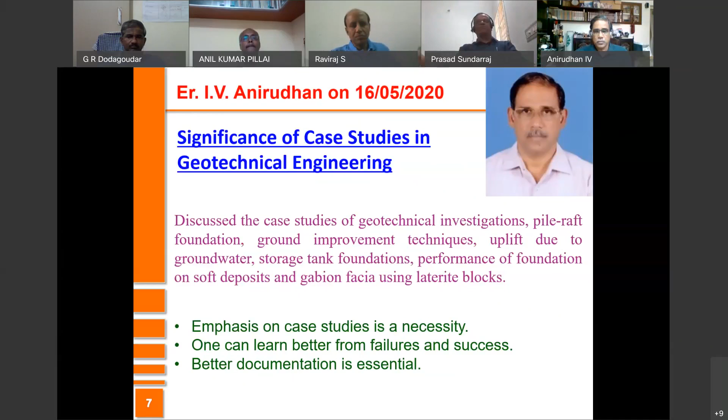The last presentation today was by our dynamic friend Professor Dodagoudar, who connected materials and environment with piled raft foundation. He spoke on the choice of material to reduce the impact on environment, and highlighted the practical applicability of piled raft foundation. From finite element analysis, piled raft foundations are identified as economical, effective foundation systems for tall buildings. He said that the raft provides additional stiffness and carries extra load in the foundation system. So wonderfully, he connected materials, environment, and piled raft foundation.